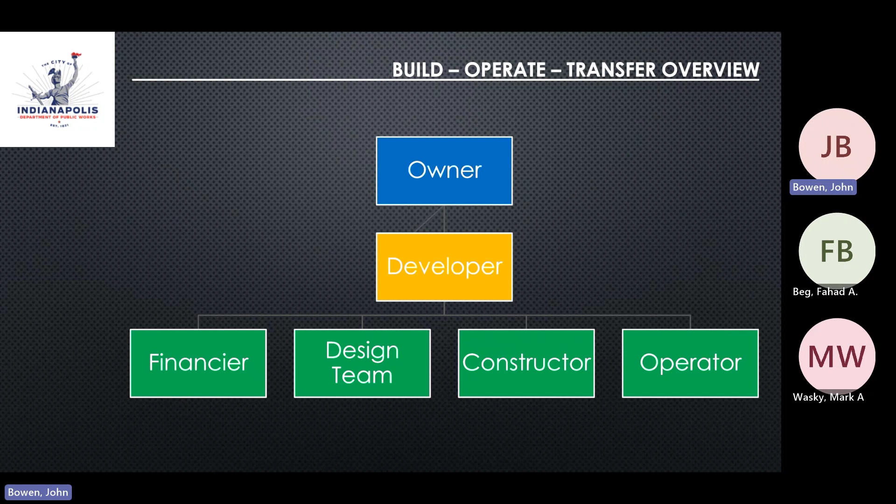I've already talked about some of these, but key for the government entity, in my perspective, is the ability to select the developers who will construct this based on their qualifications, as opposed to just them being the low bidder.

Again, an advantage is the ability for the owner to finance the project, but we're not doing that here. Early involvement of constructors and design. A lot of times the government entity does not have the wherewithal or desire to operate the facilities, so the statute allows for that, as I mentioned. And then the ability to negotiate the various aspects of the project.

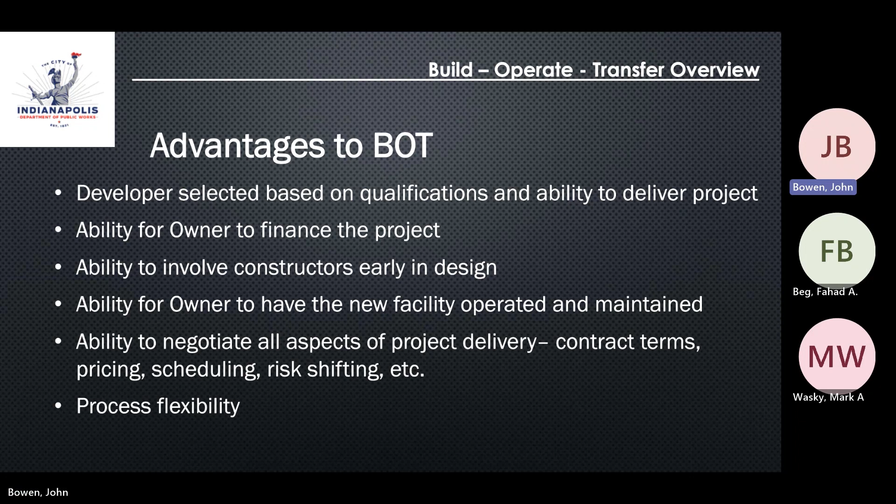The last point on that last slide was flexibility. I've talked a lot about it, but I think my last bullet point on that slide is most important. As I put it internally to Eric and others, you can build, you can operate, you don't have to transfer, you can transfer. It's almost like an a la carte menu into the statute.

So that's why we selected it. It's our hope to engage with qualified teams to finish out the design, to figure out how we're going to get this project built timely and in a quality manner. So that's why we're going through this process. That's the end of my presentation.

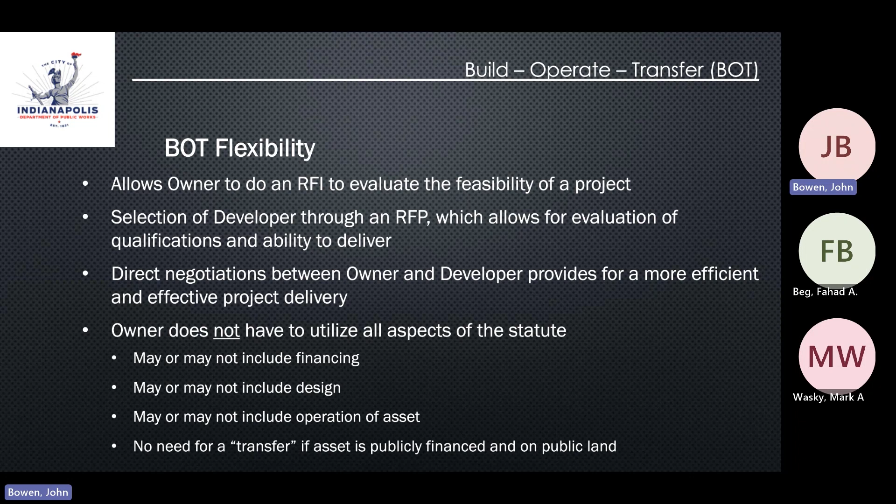Good afternoon, everyone. I am Joseph Lee from the Office of Minority and Women Business Development. If any of you did not get the pre-bid instructions, this is a document we hand out. Normally it's for pre-bids for RFPs, but this still kind of carries over to RFPs as well.

On the agenda, you may want to write my phone number down next to my name and email address. It is 317-327-5257. Email or phone number, whichever way. Just to go over a couple of things.

Obviously, as Nick said, whenever the city spends a dollar, we want to make sure we're giving opportunities to minority, women, veteran, and disabled owned businesses. The goals that the city has outlined are 15% minority, 8% women-owned businesses, 3% veteran-owned businesses, and 1% disabled-owned business enterprises, for a total of 27% minimum, every time the city spends a dollar on DPW projects, public-private partnerships, or a project like this. A couple of good notes is that—

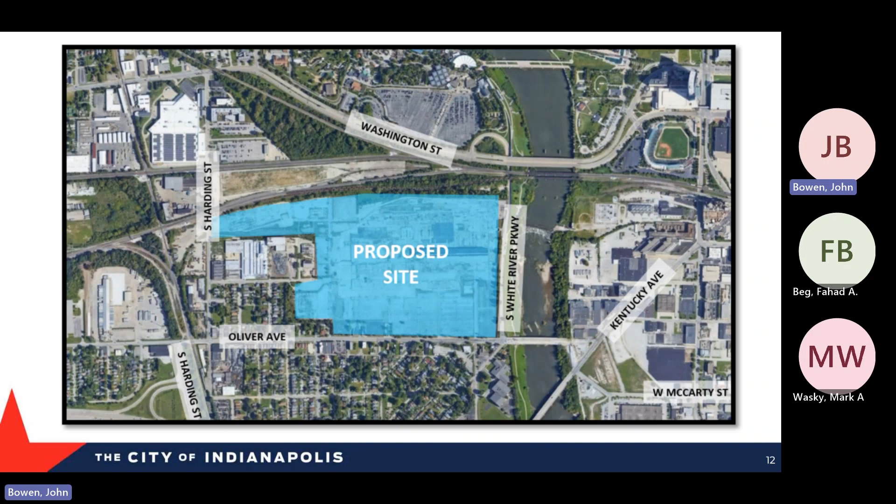The roadways to be constructed as part of this BOT contract are Henry Street from Harding to Kentucky Avenue, Holly from Henry to Oliver Street, and the White River Parkway from Oliver to Washington Street. The current White River Parkway sits on top of the levee and includes that D loop, which is a little bit off to the page up there. The White River Parkway is getting relocated to the west. The levee remains. The Henry Street Bridge is a new crossing of the White River, which provides additional connectivity.

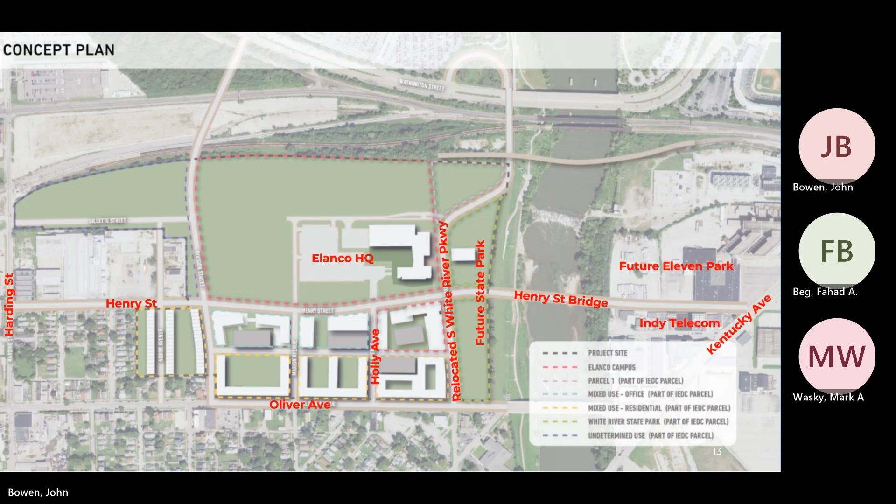This exhibit is straight from the RFP. We have broken the project into three segments: what we're calling the West Side Infrastructure Project Limits, the Bridge Project Limits, and the East Side Infrastructure Project Limits. The west side is Henry Street from Harding to the Western Bridge Limits. All of Holly Street is in the West Side Infrastructure, and all of the work on the White River Parkway, including the D-Loop, is included in the West Side Infrastructure.

The bridge project is the bridge and its approach slabs. The east side includes Henry Street, east of the bridge approach slab, all the way to its connection at Kentucky Avenue. As you may have heard from recent announcements, the Indianapolis Cultural Trail will now be placed on the north side of Henry Street from the White River Parkway all the way to Kentucky Avenue.

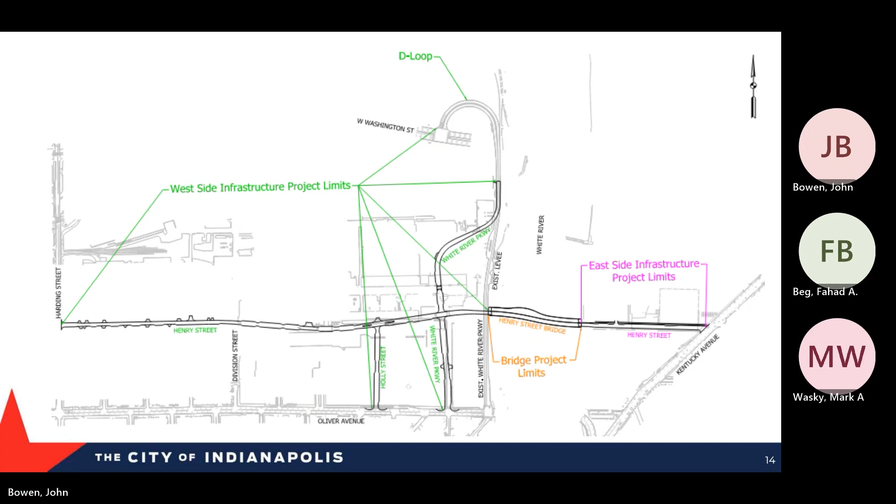The project description comes directly out of the RFP language itself. I'm sure you've read it, so we'll go into detail on a few things. It does include new roadways on new alignments, as you've seen in the plans. Not everything's on a new alignment, but quite a few are. There is also much fill on the site. We have new utilities: power conduit, water main, sanitary sewer, communication ducts, and handholes and manholes.

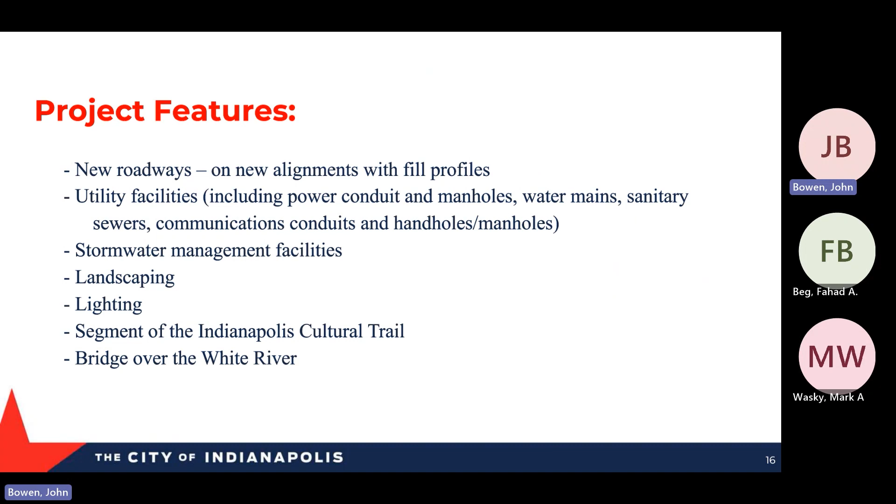Stormwater management facilities are also included. There is an existing underground stormwater storage tank on the west side of the river, west of the levee, that is intended to be reused. Landscaping, lighting, and streetscaping are all included. As I mentioned, on the north side of Henry Street will be the new segment of the Indianapolis Cultural Trail and the bridge.

As I mentioned, Harding at Henry is roughly at about the same grade it is today. On the east side of the river, Henry is roughly at the same elevation that it is today. Henry and White River Parkway all build up so that they're about at the same height as the levee.

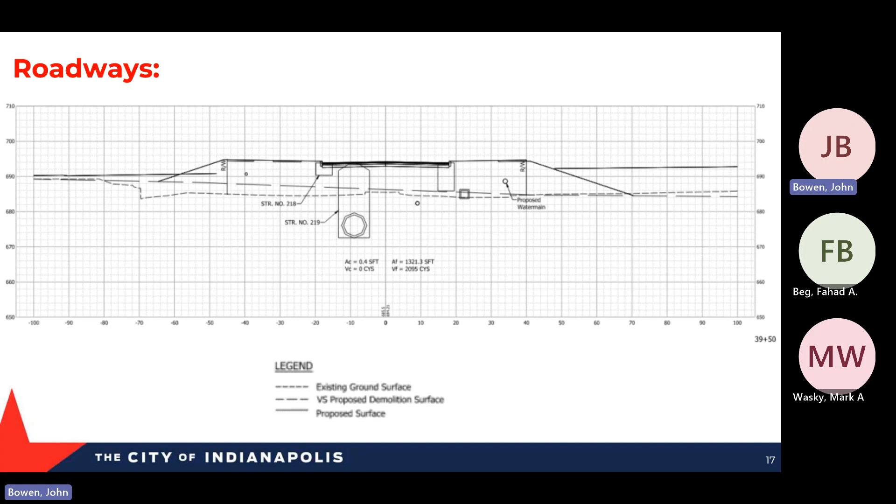Utilities and stormwater facilities are all part of the contract, and most everything is new. There are some existing utilities that will need to be coordinated, and coordination is already underway with those. Please note: the contractor is responsible for coordination of the utilities, both new and existing.

Once you are hired, that is all your responsibility. The contractor is also responsible for the installation of utilities, and for acceptance of the utilities by the utility company. So once you build it, make sure the utility is accepting what they will eventually take over. The contractor is also responsible for warranty items on utilities, as they would for any other contract through the city.

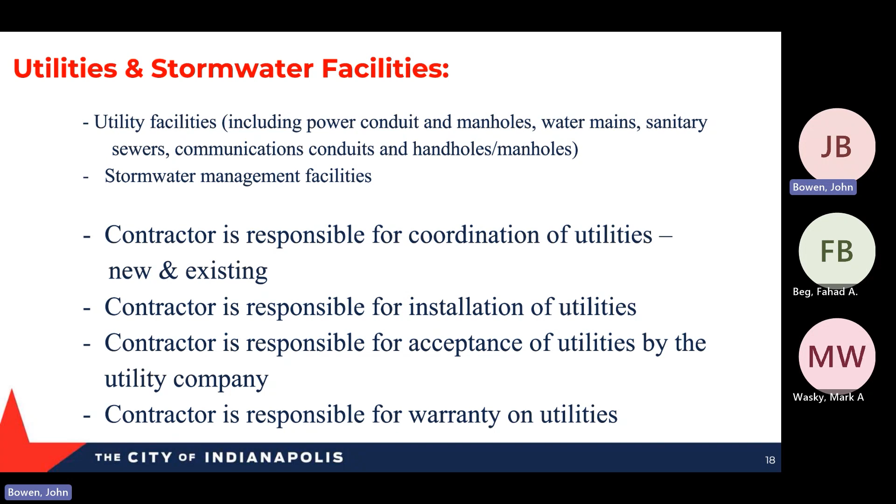We wanted to share some imagery so that all of you understand the excitement behind the project, as well as what's going in over there. The idea behind the design of Henry Street and White River Parkway is to create a linear park on the street, providing connectivity between the White River Innovation District and the Cultural Trail, a future White River State Park expansion, and connection to the neighborhoods to the south and west, creating excitement around future developments. There are many lots on the GM stamping plant site not yet allocated for development, but anticipated to be allocated very shortly. You can see the introduction of trees, pedestrian and cyclist space, and finishes that aren't your typical asphalt and concrete.

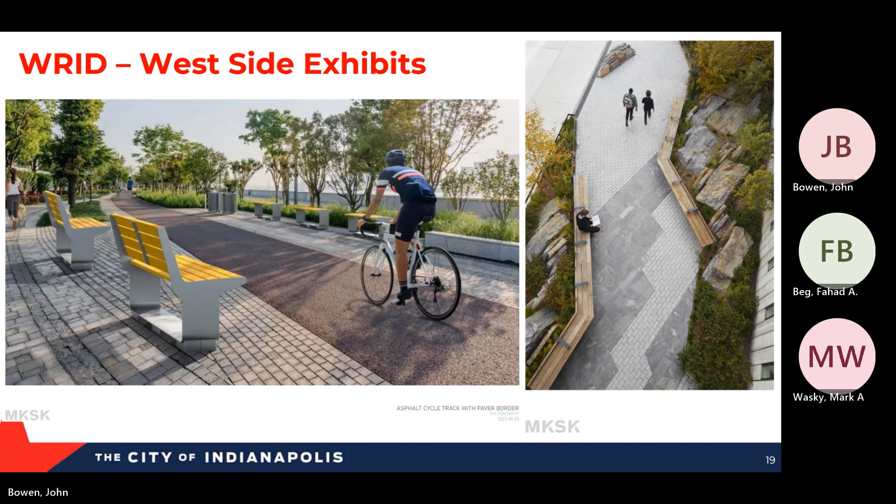Again, some imagery — this is at, I believe, the intersection of Holly with Henry Street. As you are aware, Elanco's project is being constructed; their building is coming out of the ground now. There are many interface connections between those, so they are putting in high-end finishes. Elanco's main entrance will be off of Henry Street, so it's important that those high-end finishes are there and that we coordinate with Elanco when they open. Elanco also has an entrance across White River Parkway that will connect over to the east side, which will become Future Park, where the Crane Bay is located.

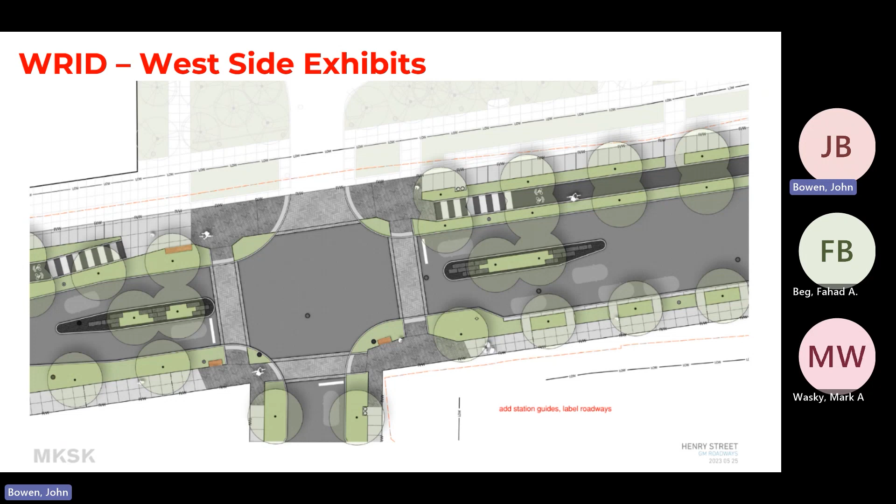Again, the introduction of plantings, trees, pavers, and lots of other finishes that are not standard asphalt and concrete.

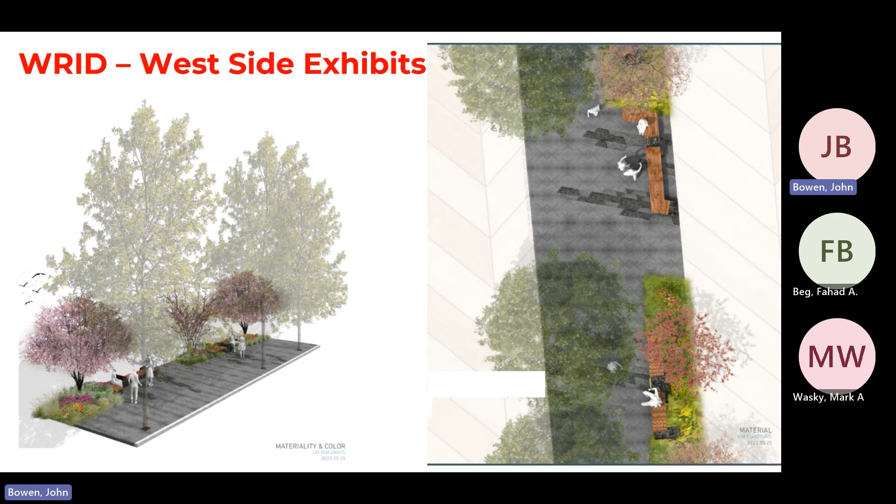Hi, I'm Paula with August Mack Environmental. We have done quite a lot of work out here with the IEDC during this demolition project that is ongoing right now. As you may know, the site was used for industrial purposes for over 100 years, back to 1898, and was most recently used as the GM stamping plant, which ceased operations in 2011.

The site has been undergoing RCRA corrective action investigations and oversight due to hazardous waste that was stored on the property and has found its way into the soil and groundwater. That RCRA corrective action is being managed by the Indiana Department of Environmental Management, IDEM, and is being handled by a different entity. There have been numerous investigations from 2010, when it entered the program, to now, including hundreds of soil and groundwater samples. So the site is very well characterized.

Even after their investigations during the demolition, August Mack found some data gaps for the purposes of reuse and the operations we were planning at the site. This is a map showing all those little dots, which are investigation points on the site, and we have a few more added to it that you'll see on the next slide.

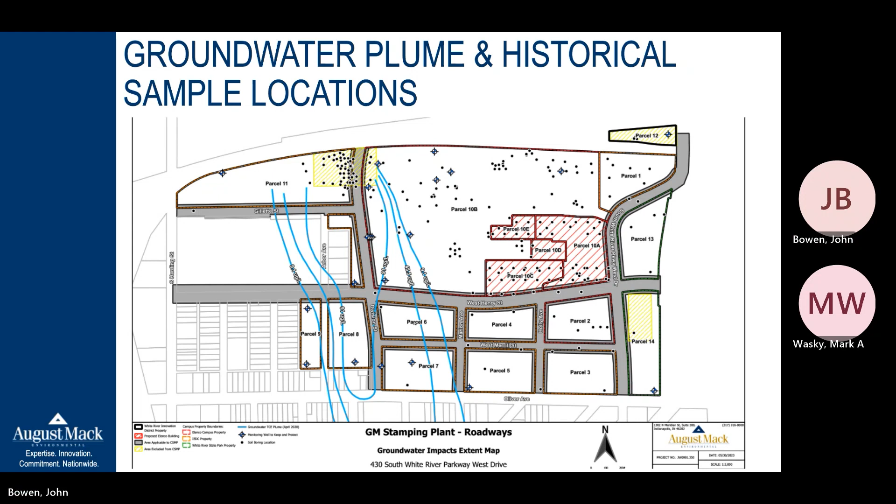August Mack got involved in 2022 when IEDC took over, evaluated the previous environmental data, and collected additional concrete and soil data necessary to facilitate the removal and demolition activities. This figure shows the right-of-way plan alluded to earlier. There were some areas that hadn't been sampled and characterized yet, so we went ahead of your work to pre-characterize these areas. Each location shown is a sample we collected, analyzed for potential contaminants all the way down to the proposed excavation depths — approximately 20 feet below surface, sampled at various intervals. So no matter where you're digging, we have a general characterization of that material.

The soil results on this figure are color coded, and based on the results, we classified them into different categories in accordance with the reuse approvals.

The reuse approvals basically was a process we went through with IDEM to say, here's our classifications. We've characterized the soil or concrete, and it's below human health screening levels, and it can be reused on the site.

So we detailed this in the soil management plan, and the beneficial reuse approvals were also in the bid packet. I would highly advise that you at least look over that, because it is probably a little different than some other projects you've been on, with the different classifications and how it's managed and what we need to do.

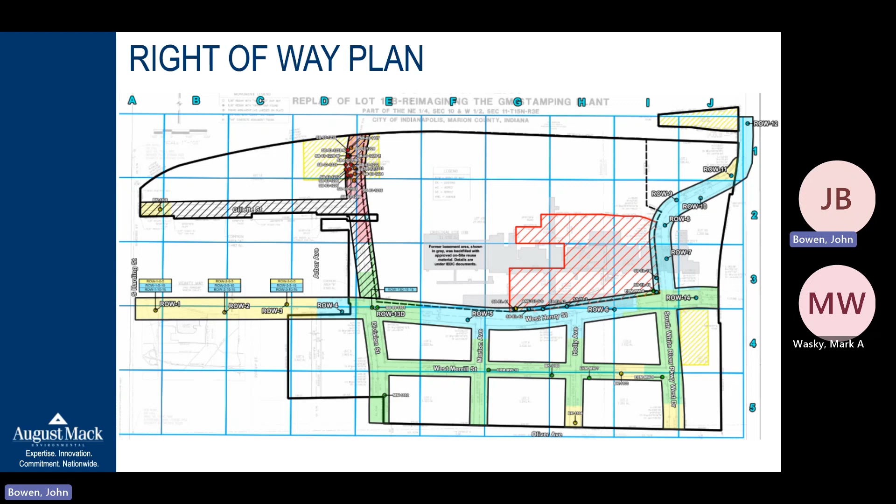So this figure shows the current monitoring wells on the site. Along with the RCRA corrective action, they have several monitoring wells to monitor groundwater on the site. There have been several that have already been abandoned, that were in the way of previous or current projected activities. These wells, we believe, are outside of the right of way.

So they are protected by Jersey barriers. They need to be maintained and protected during construction activities. If it's determined that they may be in your way, you need to contact us and we can figure out a solution there. But the RCRA consultant does conduct semi-annual groundwater sampling, so these wells are very important to that project.

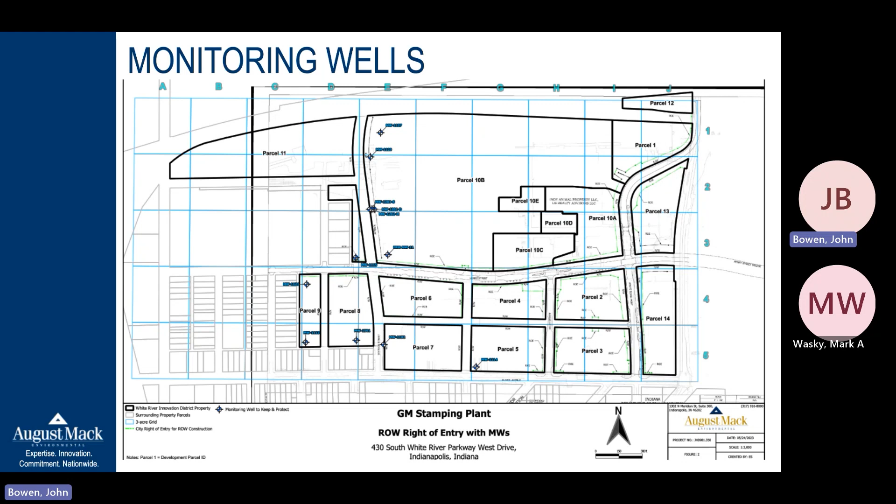This slide is very similar to the one Cassie showed earlier, just indicating the green hashed area, which is the area underneath the roadway or sidewalk where you can place this reuse material. The reuse material was either soil or concrete that came from the site, that was analyzed and determined acceptable to be reused under a cover. This asphalt or concrete roadway is an acceptable cover according to IDEM. You can place it directly below the roadways.

But August Mack will definitely need to be aware when you're placing this material, because we have to identify those coordinates to be able to report that at the end of the project to IDEM. We have environmental restrictive covenants on the site already that restrict exposure to these areas, so that's nothing you will need to worry about.

Although there are certain precautions outlined in the bid document with this reuse material, mostly it's keep it above the groundwater, 2 feet above the groundwater. Reusing this material that's already on site has the potential to help reduce some costs to the project, rather than hauling that material off that you're excavating, or hauling material on site from somewhere else.

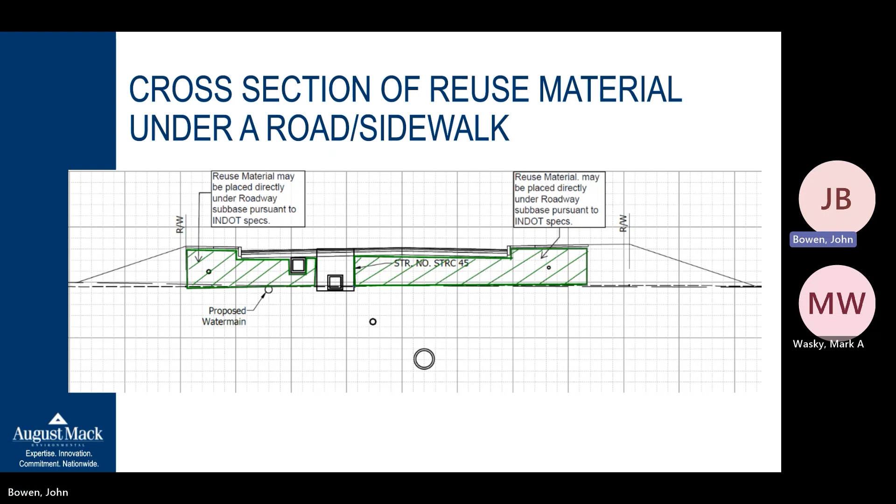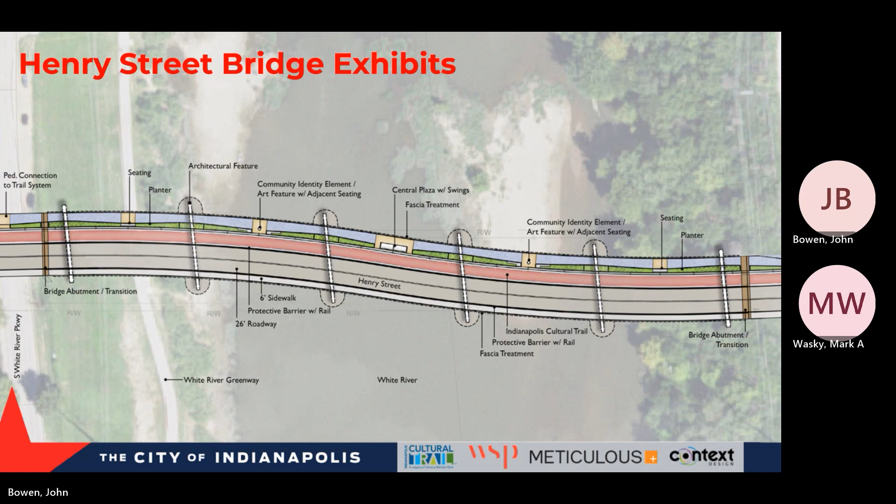The cultural trail is shown on the north side of the bridge here. There's a sidewalk on the south side, 2 lanes of travel. We do have plantings on the bridge. We do have decorative railings along with the crash barriers closer to the travelway itself. The rings, you can see the rings - long story behind that, it's probably in the news.

These are the same renderings that were from the public meeting held a few weeks ago. The bridge is still under design. We do have the permits - we have the DNR construction of floodway permit, and we also have the US Army Corps of Engineers permit already secured.

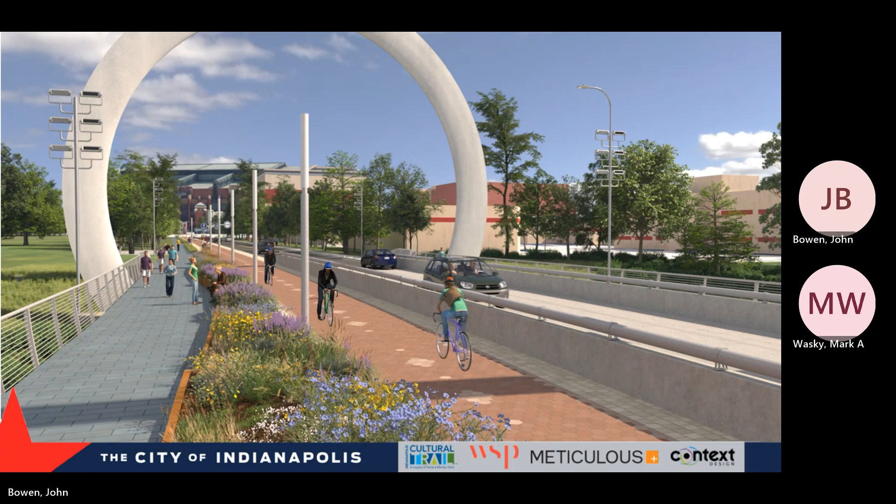Just flip through the imagery - there is lighting on the bridge. There's cultural trail lighting, the grayish silver lighting that's on the single post, but there is lighting also included. You can see the mast arm there for the south side sidewalk, as well as lighting for the rings. These rings can be lit up in many different colors, in fact.

The current trail that's there, the Greenways Trail, that trail will remain when the construction is completed.

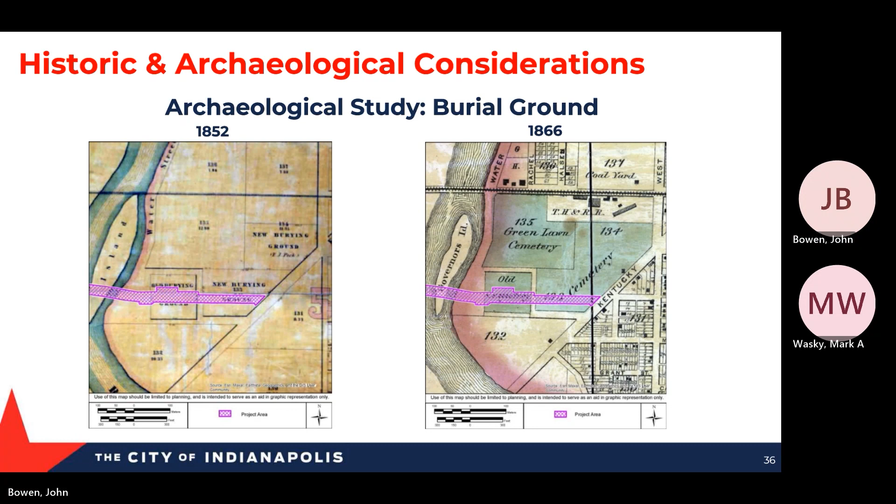The burial ground reached its full extent in 1866, and then it began to be expanded to the north. Then the area transitioned from cemetery to other uses. In the 1870s, burials were supposed to have stopped at the site because it had reached capacity, but it was not until 1891 when there was an actual bill to vacate the grounds. At the turn of the century, plans were made to transform the burial ground into a park.

But since that time, the grounds have transitioned from cemetery to today's site, and we know much disturbance has occurred. We do know that graves were removed, stones and markers were removed, fill was brought in, and the park fell into disrepair. We know that the river has eroded the far western edge of the cemetery and an additional area of African American burials. We do know that fill from the east side of the river was moved to the west side of the river. There was the Federal League baseball park, but that was demolished 3 years later.

Can I make one addition? You probably may notice Cassie talking about a burial ground - it is a burial ground legally because it is no longer a cemetery. The language you use to describe that is important because the laws tied to whether it's a cemetery or a burial ground are different. So this is a burial ground, it is not a cemetery. The point of this is also to say that there has been much use over time.

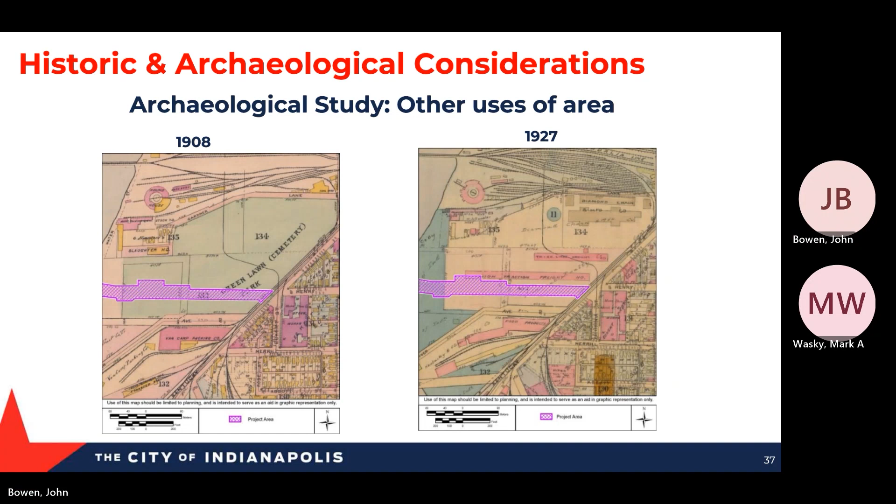So how are we going to handle some of this during construction? We're going to be monitoring during construction. Whenever you're building in this area, we will have on-site archaeologists monitoring the excavation. If something is found, or if the soil type changes, we have a plan for that - work will have to stop. We do have to call different people like the Division of Historic Preservation and Archaeology, and we do have to call local law enforcement. Then those agencies tell us where we can continue to work. Typically we would have to stop and move 100 feet away from where we're working.

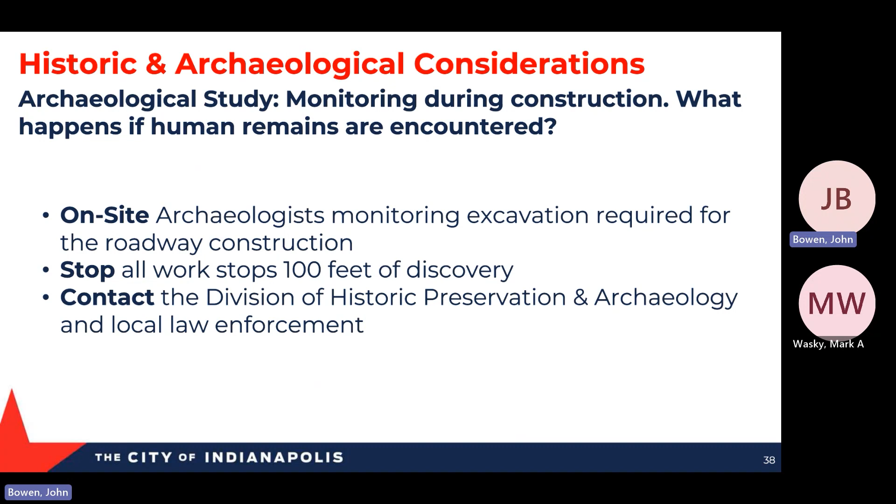What happens if we encounter human remains? There is a possibility that we encounter artifacts, but not remains. What if we encounter human remains? We do have, and when the shortlisted firms are selected, we'll have additional information for you, but in general, we secure the area. We want to provide as respectful treatment as possible to anyone who is found at the site. Documenting of the human remains will happen - it's done by GPS to the sub-centimeter.

Photographs will be taken. We will remove the human remains and send them to a secure facility at IUPUI. The goal is to remove the remains by the end of the workday, because we want to treat all remains respectfully during the documentation and removal process. All artifacts and any remains recovered will be respectfully removed and transported, then analyzed by qualified professionals according to the laws. The status of the human remains will determine the analysis provided. IUPUI conducts that analysis, and Dr. Jeremy Wilson is leading that up. Once the analysis is completed, the human remains eventually will be reinterred at a local cemetery. So you will be working with the city's archaeological team to do this work.

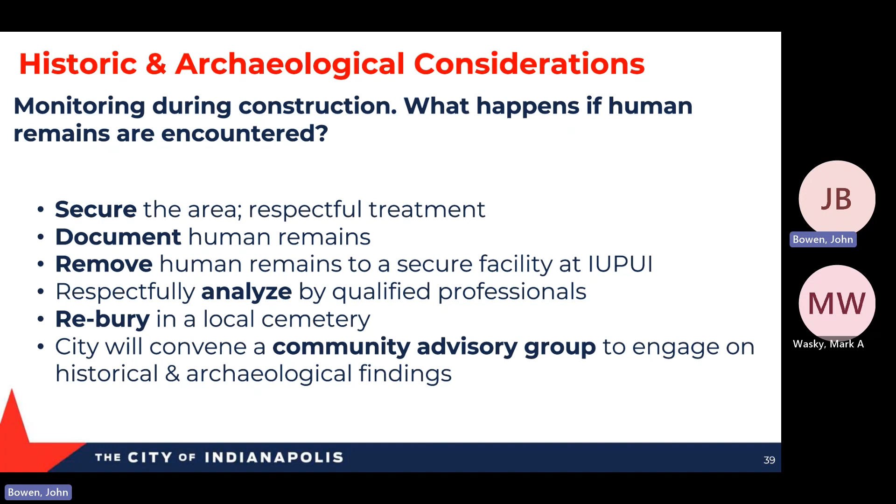And just to touch on what Cassie mentioned about the change in soil - the archaeologist is looking for changes in soil color that would indicate human remains or artifacts. That's what they're looking for when they're on the scene.

All right, timelines for design and construction. This is straight from the RFP as well. Final design we are expecting in July, procurement in August, and then construction will begin very shortly thereafter. As Erica mentioned, this is going to run through the city's procurement process as quickly as possible.

Substantial completion is tied to Elanco. We get a schedule from Elanco once a month. They are moving in and expect to be substantially complete December 31st of 2024. It is tight - I see people laughing, yes we know that. It is possible though, we've analyzed this.

Okay, the Henry Street Bridge. As I mentioned, the design is a little bit farther behind than the roadway design. August of 23 is approximately the 90% design, with final design in October, and then substantial completion in March of 2026. That is an entire year beyond the roadways.

Timeline for the east side of the White River: procurement in August, construction beginning hopefully in September. We do realize you have to have an archaeologist on site, and we know you're probably going to want to start digging as soon as possible rather than leaving this to the very last minute, because there's a lot of excavation and the potential to find things. Substantial completion for the east side is also March of 2026.

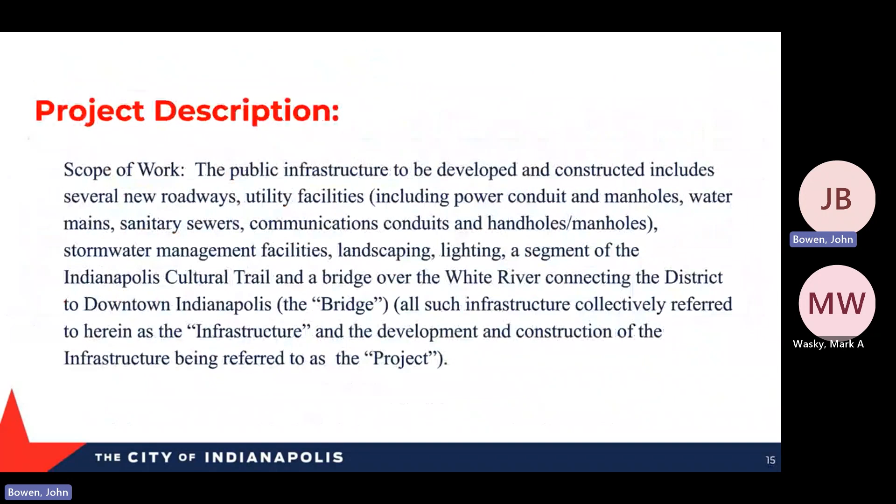On the schedule, we had that offerers are notified of their shortlist period June 21st. We have those meetings scheduled for, I believe, June 21st or June 22nd. We're waiting on a couple more confirmations for some things to move around. Those are already scheduled and we will get those dates in here for you.

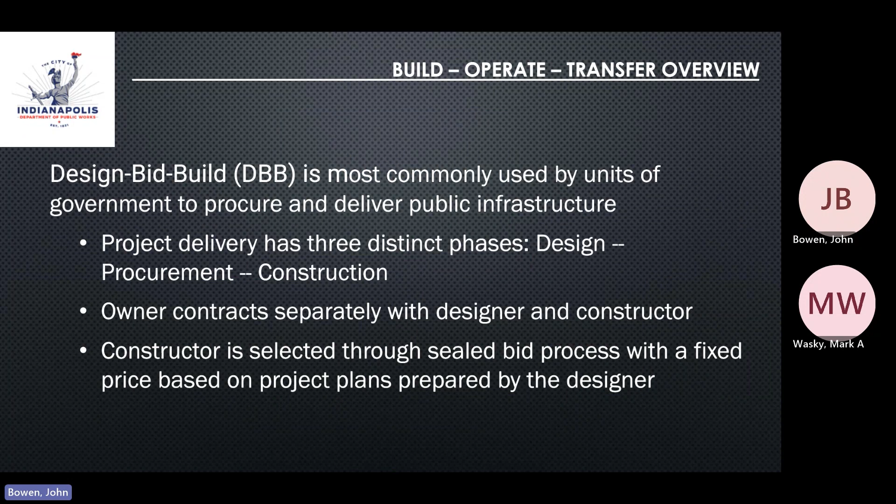And that is the end of our presentation. We'd like to open it up for any questions, if anyone has any. We are also still taking questions, and we will post additional answers to your questions on the project website by June 6th. But if there's any that you have today, we'd be happy to answer them while we're here.

Now, there's a lot of contingencies here. That's why I told you about environmental, archaeological. The city will have some money set aside in contingency to address those, and the various risks presented by those things is what's all subject to negotiation. BOT is nothing but a procurement.